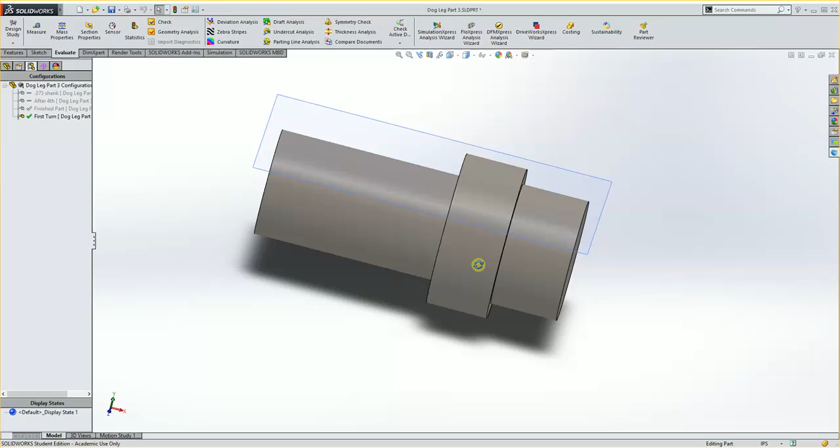So in order to do that, we're going to kind of get this reoriented to what we want. And we're going to change this to the after 4th configuration under the configuration tree, because this is what we're actually going to be programming here.

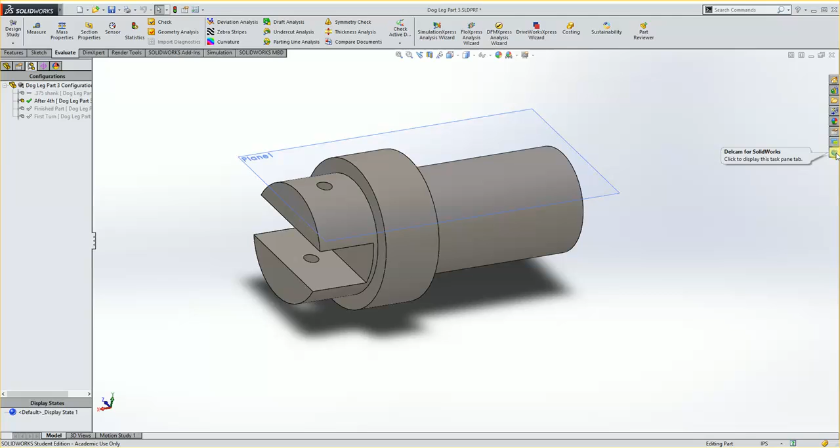Now, at this point, we're ready to kind of go into the DFS portion. So I'm going to go over here to Delcam for SolidWorks, machine a part, current part, yes, MC inch mill, because now we're going to the mill, open, and it will pull this in.

Now you'll see the Z is oriented right, and it doesn't matter how this looks here because it'll just rotate for us to get what we need. If we wanted the Z to point this way, we could, but we don't need to.

Right here, it's important though to change this from 3-axis milling to 4-axis milling. If we don't do that, it will try to make new setups on the side and think you're actually rotating the part in the vise and restarting.

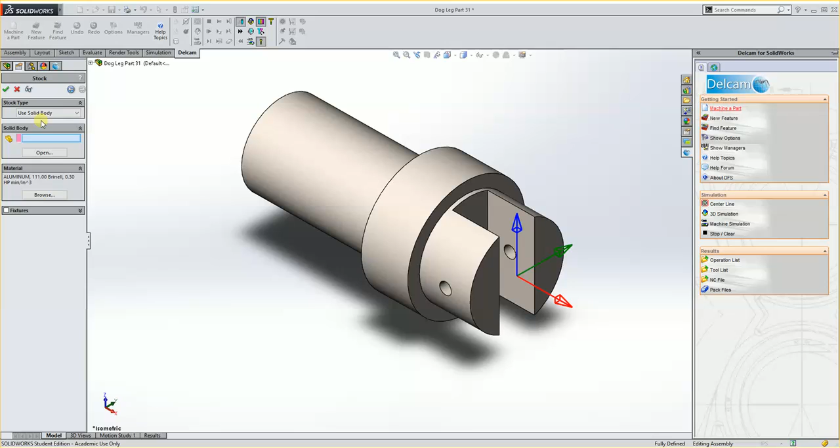I'm going to hit the next button, and here I want to change this from bounding box to use solid body. And my solid body, I'm going to say open, and we're going to find the actual part that we're using. In my case, it's on my desktop, under dogleg part 3.

When it asks us for the configuration here, I'm going to tell it first turn. So when you look here, you have your different configurations you made. I'm going to go with first turn and hit open.

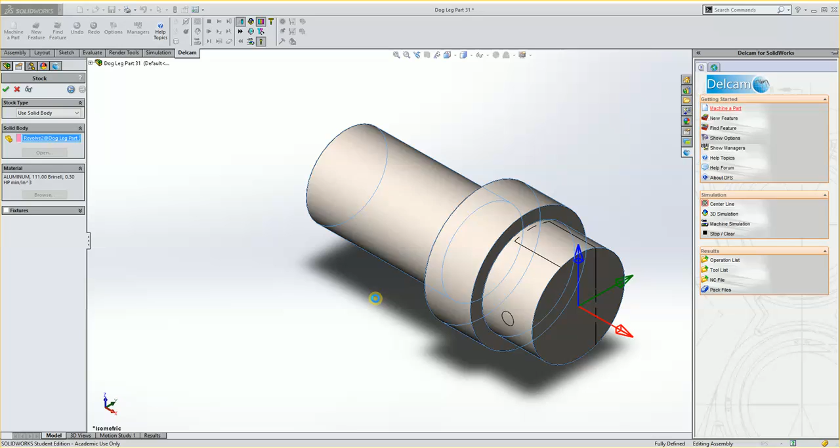And what that does is it pulls in the part that we had just basically turned on the lathe, and we'll use that as stock. Our material here will be changed now to stainless, and I'll say OK.

And I'll accept this. Now it asks us for our setup, and I can just go with what we have here. So I'm just going to say OK. Alright, so the setup is ready on this.

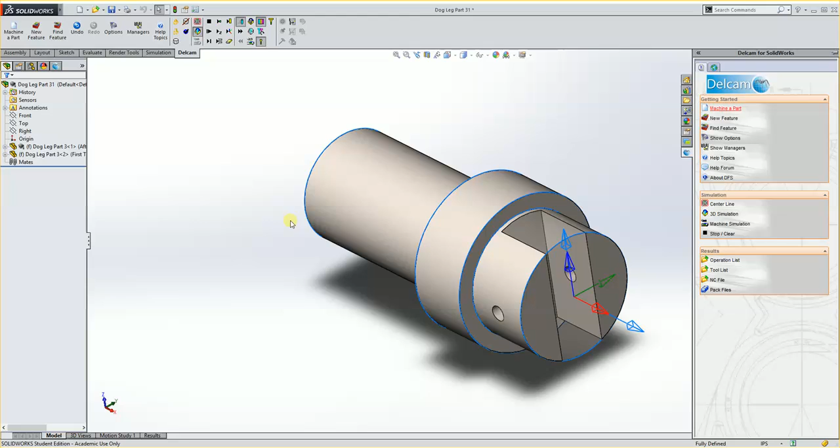Now, a couple things that we're going to need here. We're going to need to—well, there's only one thing. We're going to need to make a sketch that's out on this face that's in the center of this. So to do that, I'm going to pick this face right here, and I'm going to tell it that I want to sketch a line.

And I'm going to make the line from here, just kind of out a little ways to here. I'm not too worried about where it's at exactly yet. I just wanted to get it initially aligned to this origin here.

But I'm going to get rid of that relationship here because I want it to extend further this way. So I'm going to click on this relationship and hit delete. And then I can grab this endpoint and I can move it. I do want to try to keep it snapped. See how it snaps to the center there?

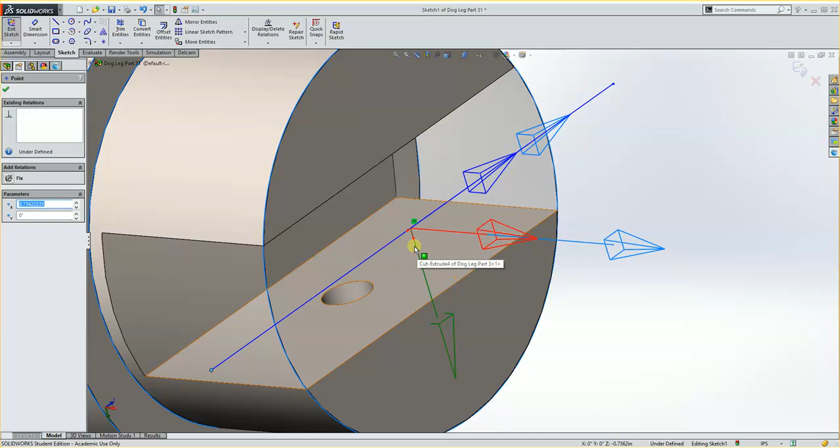And I want to then do some smart dimensioning on here. I'm going to smart dimension from the origin to the endpoint here. And I want this distance to be... Actually, now that I'm looking at this, I think this might not work right. I do want the distance to be something like 1.25. But the problem is that it's dimensioning it from the front.

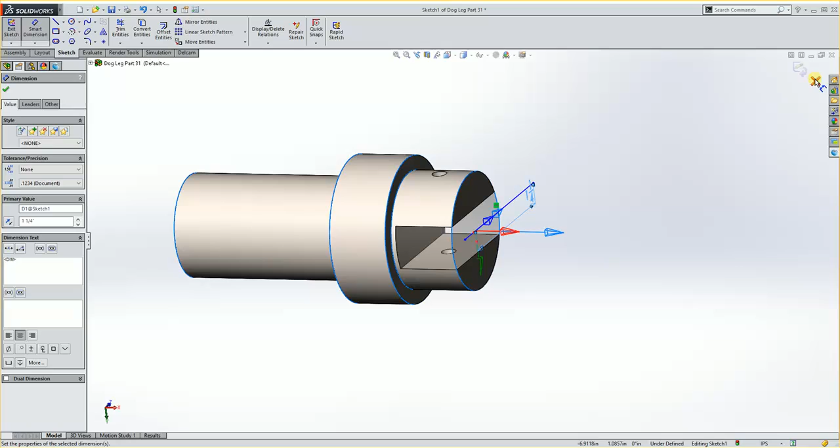And I want to do a side groove, so I need this sketch to really be on this plane here. So I'm going to go ahead and discard this, and discard my changes. And I'm going to make basically my sketch on the center axis here.

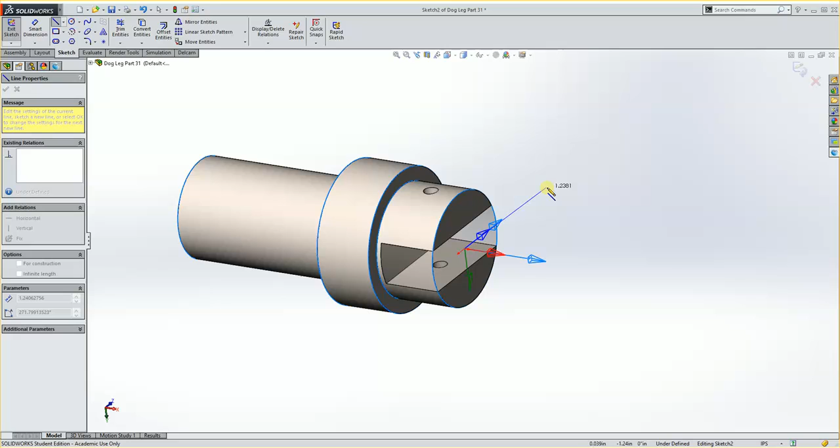So I need to look at this. Looks like my top plane is where I want to draw it. So I want to draw on my top plane. And I want then to make a line that goes from my origin out like so. And I'm going to hit escape.

Then I'm going to delete this relationship and do the same thing I was doing. I'm going to drag this out.

Alright, so now that line, when I smart dimension it from the origin to here, you'll see that my smart dimension is coming in from my top plane. And I'm going to make this 1.25 to start with. And that'll give me the distance out there.

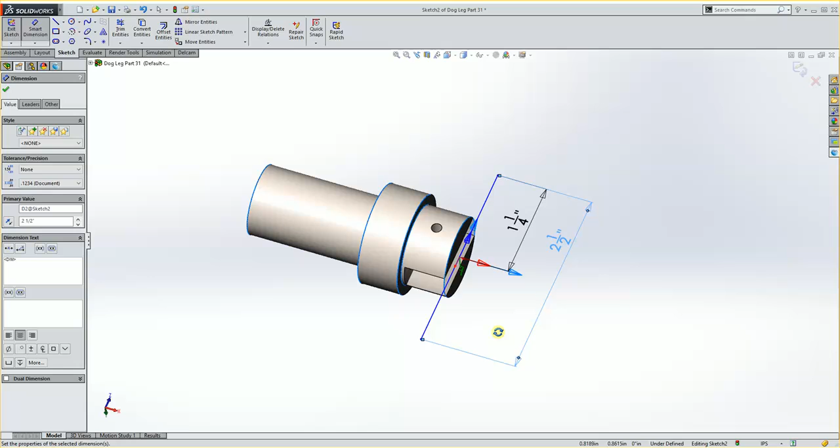And then I want to make this number of the entire line twice that amount, so it would be 1.25 times 2. That makes it so that it's going halfway up, halfway down, exactly in the center. And I'm going to accept that.

Now what the sketch is going to do is it's going to allow me to do the slit through here. And I need this line to be—it may need to get bigger so that the slitting tool doesn't come down and smack into these corners.

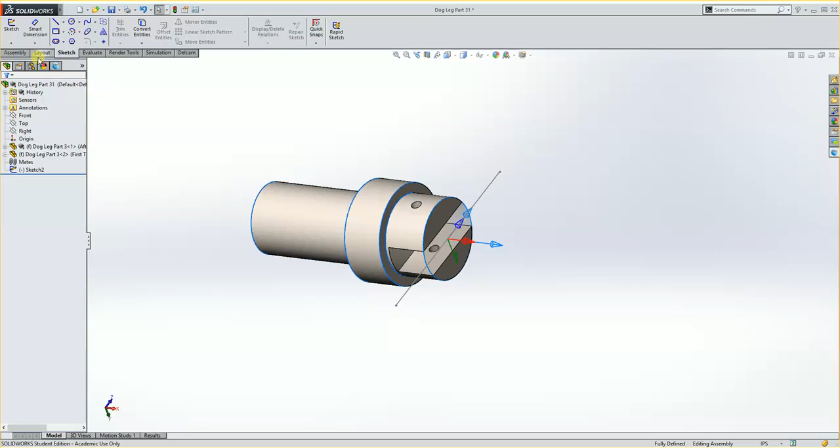Alright, so I'm going to now go in here and start getting this hole drilled through. I'm going to go to Delcam and do a new feature. What I'm going to do is spot drill and drill halfway through, rotate it around, spot drill and drill the other halfway through, and then ream from one side all the way through. But I'm going to set them up as both doing reams, and then just uncheck the ream portion of the first one. That way it'll pick a smaller drill for the first hole. So I'm going to go to hole and hit OK.

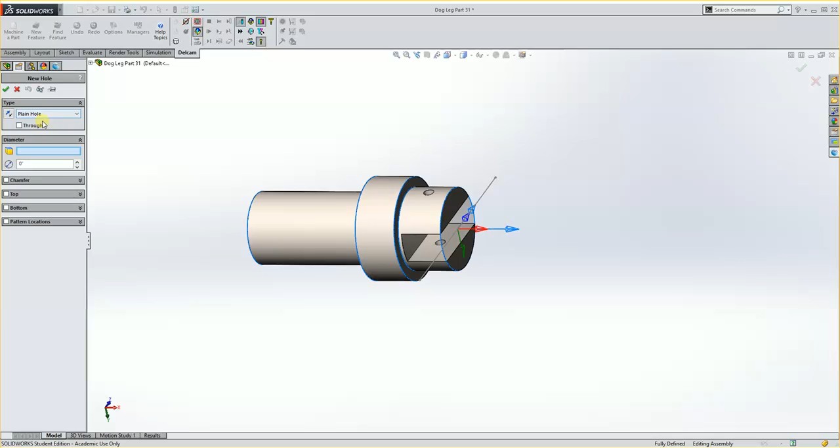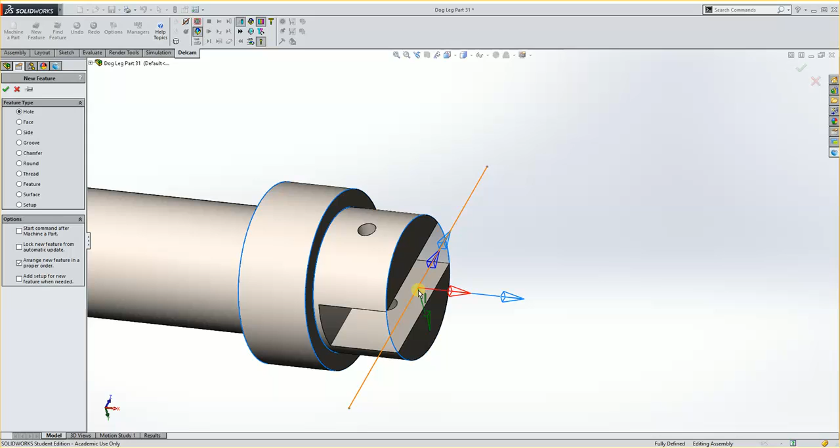Plain hole, and then my diameter, if I zoom in here, is going to be right here. Now one thing I want to do before this is make sure that a certain checkbox isn't on. I'm going to close this out and go over to DFS features. When I go to new feature, I just want to make sure down here there's not a checkbox in this 'add setup for new features when needed.' If that's checked, it'll try to make new G54, G55, G56s, and I want it to keep just the same one and then rotate the A axis.

Alright, so I have hole, I hit OK. Diameter, I'm going to pick this diameter here. And it's really important when you're doing fourth axis to look at how this yellow arrow is pointing. Notice how the yellow arrow is pointing up. In this case, it would try to take a drill and come up through that hole. Well, we want it to go down through that hole. So I need to click on this button right here that says flip. Now you'll see it's trying to drill down into it. So that works out okay.

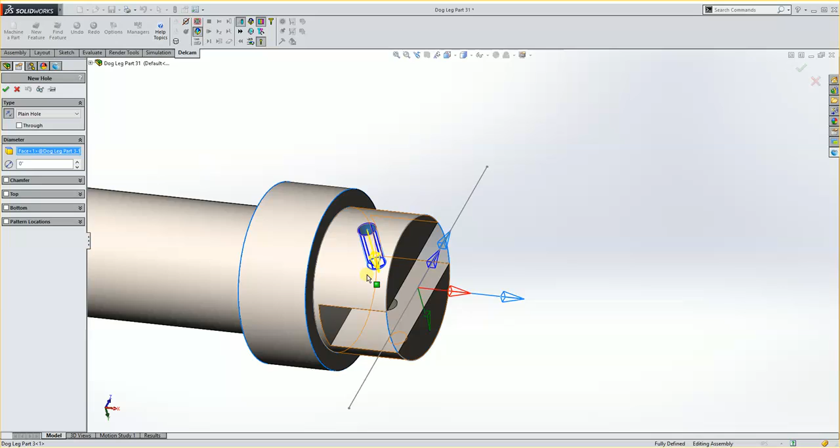Basically, the next thing I want to do is have this go a little deeper. So my bottom, if I look right here, I'll click bottom and pick this face here. It's going to go to that face, but I want it to go an additional 0.2, so that'll get it to go a little bit more than halfway. This is 3/8 wide, so that would be 0.1875. I could even go maybe a little more, maybe 0.250, just to get it to go enough. And then I'm going to hit OK.

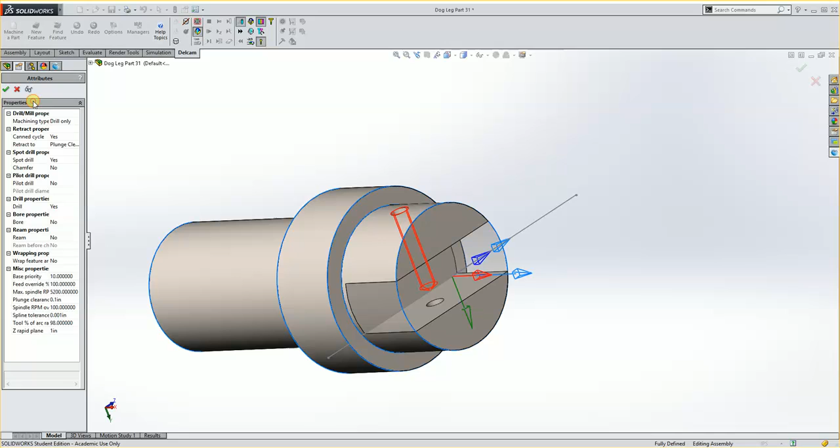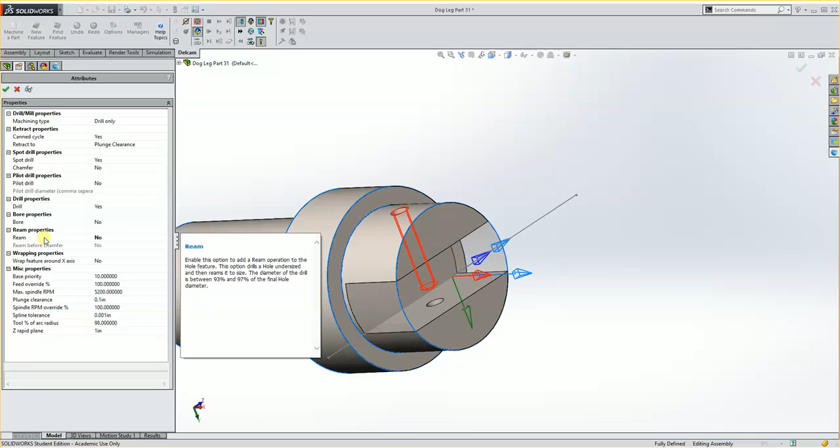Now it spot drills and drills it, which is a good start. I want to go into my hole and double click it, and I want it to say that I want to ream it. So here it says ream: no. I'm going to double click that to say yes, and hit OK. Now it says spot drill, drill, and ream. I don't really want it to ream that, I want to uncheck the ream. But the point is to tell it to ream it so that the drill size brings in the 120 drill, or the number 31. If I don't do that, for instance, if I go back in and tell it ream: no, and hit OK, you'll see that my drill size is trying to be the 125. So I'm going to go back in again and double click ream to yes, and that way it'll update the drill to the smaller size.

Alright, now I need to do another new feature, hole, and this time I'm using this hole. You'll see the arrow's the wrong way again, so I flip it. And I tell it bottom of here with an additional, again, 0.2, so that it goes through. And you'll see that they're hitting each other. I'll hit OK. This one spot drills and drills, and now I want this one to ream. So I double click here and say ream to yes, and hit OK.

And then I'm going to tell it in my ream, when I double click the ream, that I want it to go a certain depth. My drill depth for the ream, I want it to go all the way through. So since we know this is a 1-inch diameter here, I'm going to tell it that I want to go 1.1, something to go a little bit through it. Then hit OK.

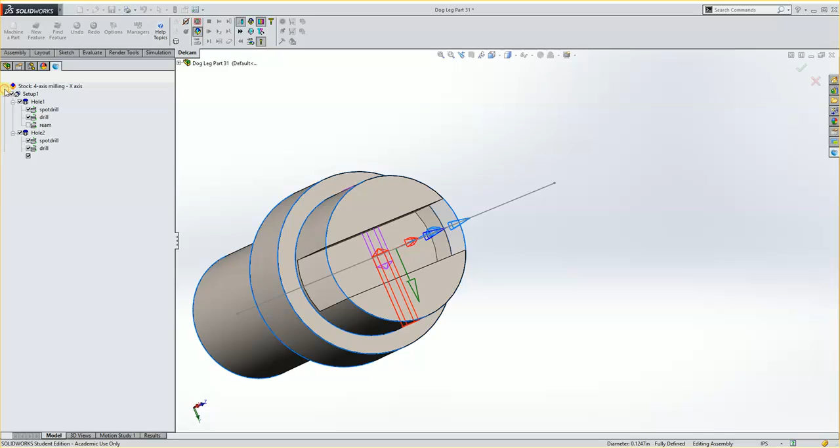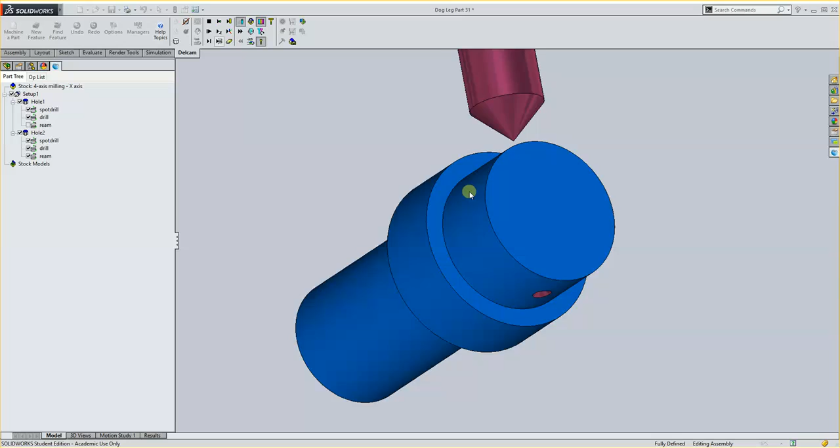Alright, so let's look at a simulation here. If I single step this, you'll see it comes in with my spot drill, rotates that back a little bit, spots it, and it's going to rotate my part around. Now if I look down here, you'll see that it's rotated, and I'll do this side, so it does both hole spotting. Then it comes in, grabs a drill, drills this side. Notice how it's pecking.

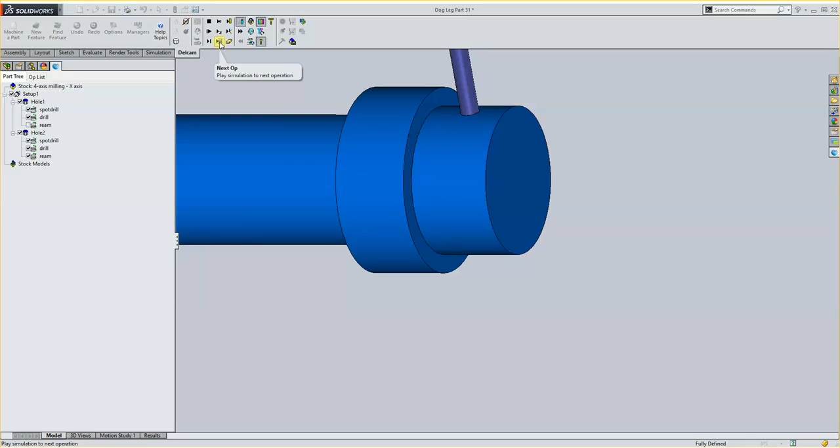And I can tell it to go to the next operation. I'll single step it. Now it's going to drill the other side, next operation. And then I'll single step and you'll see the reamer goes all the way through. And I will stop it.

So you'll see I have my hole all the way through there. Alright, so that was the easy part. The harder part is getting this slitting saw to come through here.

Now with this here, I'm going to do a new feature. And this is going to be a groove. And I'm going to hit OK. The type of groove we're going to do here is a side groove.

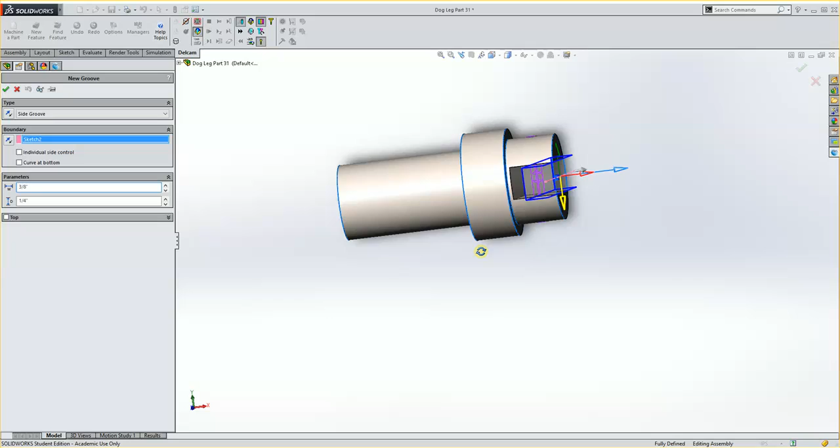My boundary will be this one here. And you'll notice how, because I put the line where it's supposed to, it is centering it and everything. That's good. The width of my groove is going to be 0.375. And the depth of my groove is going to be 0.25.

I'll zoom in here a little bit. You'll see that goes right to the bottom of that there. So everything looks pretty good here. So I'm going to hit OK. Now I get my groove there.

I'm going to uncheck the groove so that I can actually just play a simulation here of the whole thing, hole-wise, and save this as a starting point, so I don't have to re-simulate that each time. And I'll stop. I'm going to uncheck hole 1 and hole 2 and check groove 1.

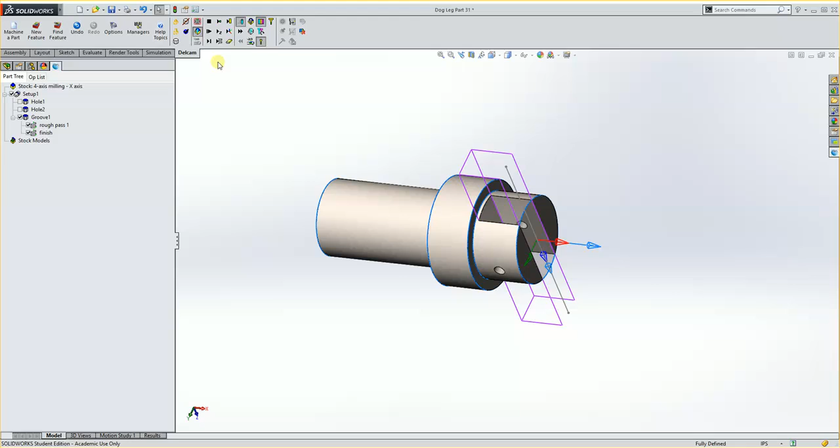And now this way I can do a simulation stepping it and single step. And I can see my tool here. I'm going to look at this in more of a top view.

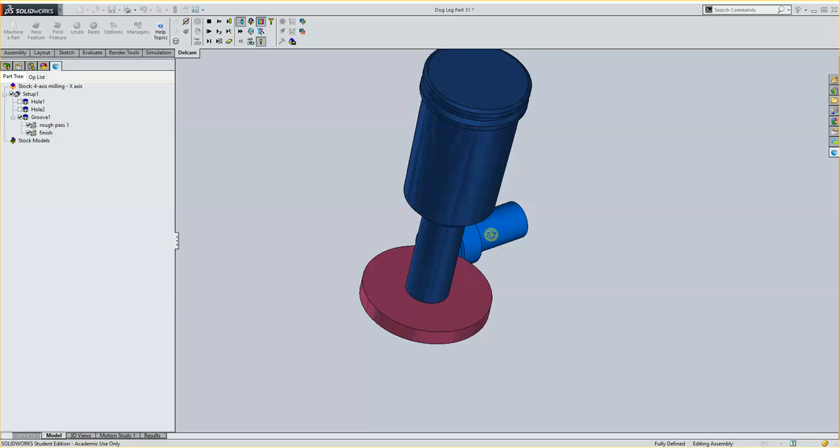And there's going to be some stuff I'm going to need to change about this. There we go. So if I step this, you'll see it comes in, but it's taking one hefty cut and going across, coming out, and then it does the finish pass. That's all fine and dandy if you had some miracle cutter, but that's not going to work on what we have. We need to step that in 3 times.

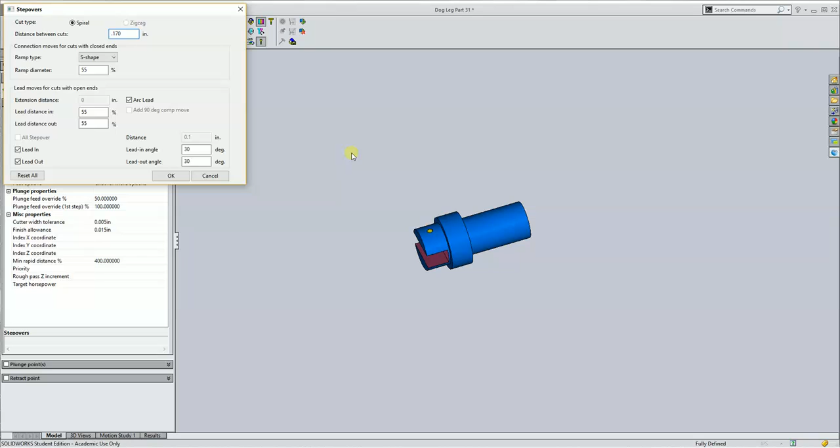Now when we step that in, we'll run into problems where for some reason the lead in, lead out doesn't work properly when we have extra rough cuts. So if I go in here to rough passes and I go to step overs, if I change this number up here to 0.170, which is a number that we've come up with in the past that works, and I hit OK, and then I try simulating it, what it will do is basically crash into my part.

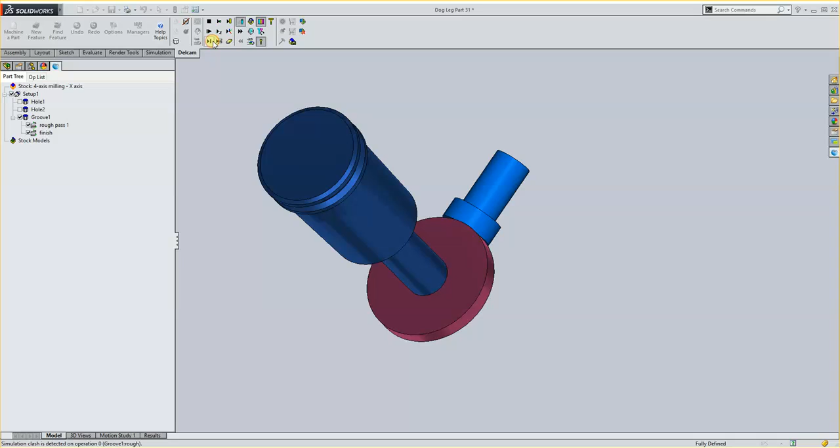Of course, it's not looking like it is here. Let's see. And it's actually coming back and then crashing. And see how it's crashing into the part.

So it's doing a couple things I don't like. I don't like the bidirectional cutting. And I need to extend my line because it's crashing in because the lead in, lead out isn't working properly.

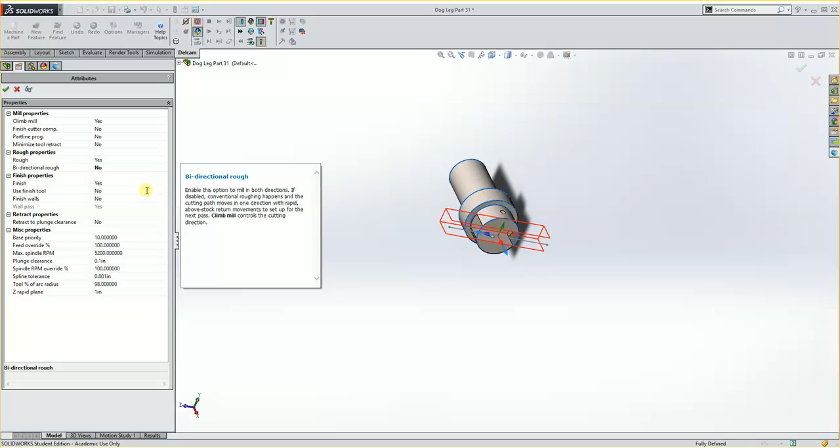So to do this under my groove 1, I'm going to double click it, and I'm going to see a spot in here which says bidirectional rough. I want to turn that to no. It's the only thing I need to change in there.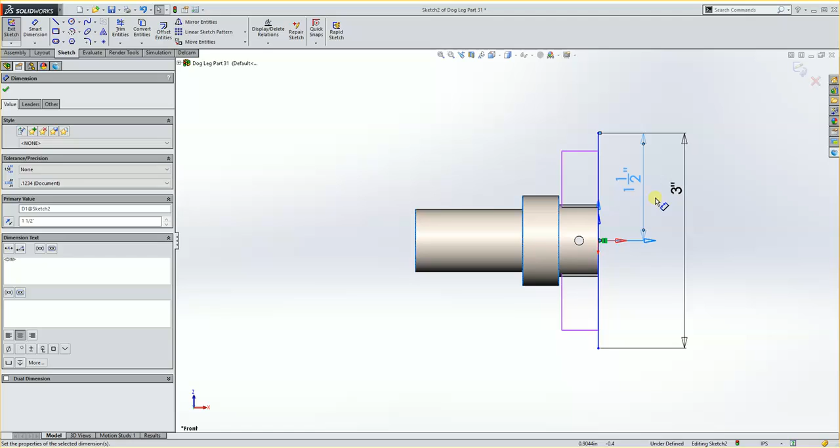And then I'm going to look at this from a top view, and I'm going to edit this curve. I want this to go a little longer. So I'm going to go edit sketch, and I want this to maybe be, oh, let's say 3 inches long. And then this would have to be 1.5 to get it centered. And I'll hit OK. Now if I simulate this tool,

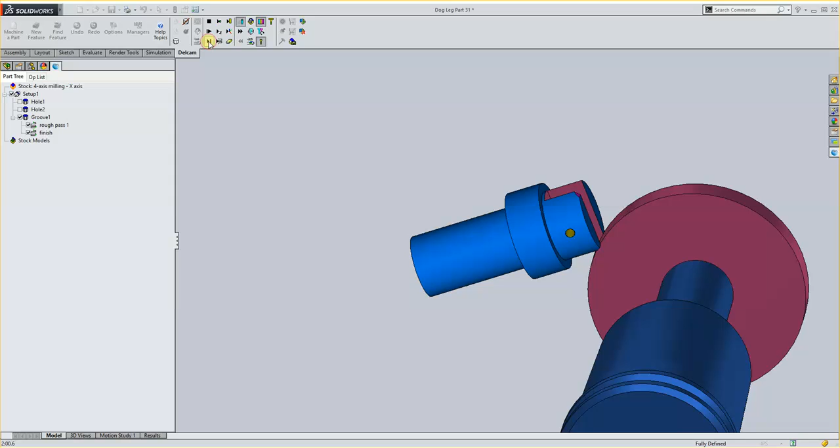It'll come through. So see how it's climb cutting each time. And it's still hitting a little bit there. But it's pretty good. We could just extend that a little bit more and it would get rid of this little clip.

But you'll see it going way in and out here on the finish pass. So on the finish pass, we're going to turn off the lead in, lead out. We'll just do it on both because it's really not working for us.

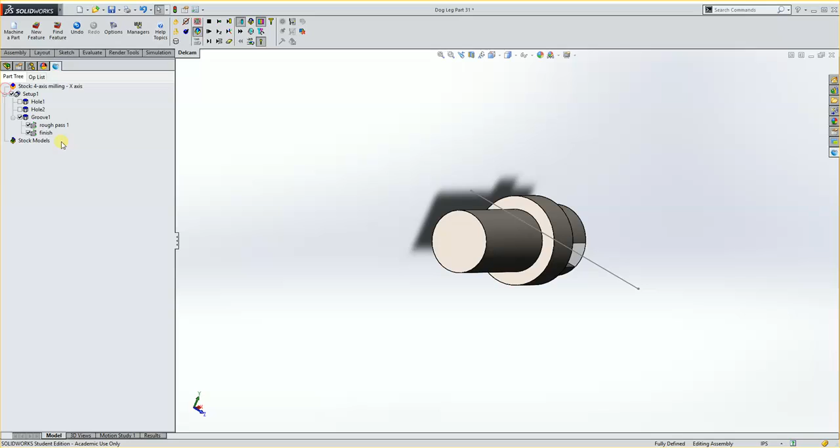So I'm going to go to rough pass 1, double click, step overs, double click, and I'm just going to turn the lead in and lead out off and hit OK. Then I'm going to go into the finish and do the same thing. Step overs, turn the lead in, lead out, off, and OK.

And again, I wanted to make this sketch a little longer, so I click it, edit, make it 3.25, and make my other half 3.25 divided by 2 to get it centered.

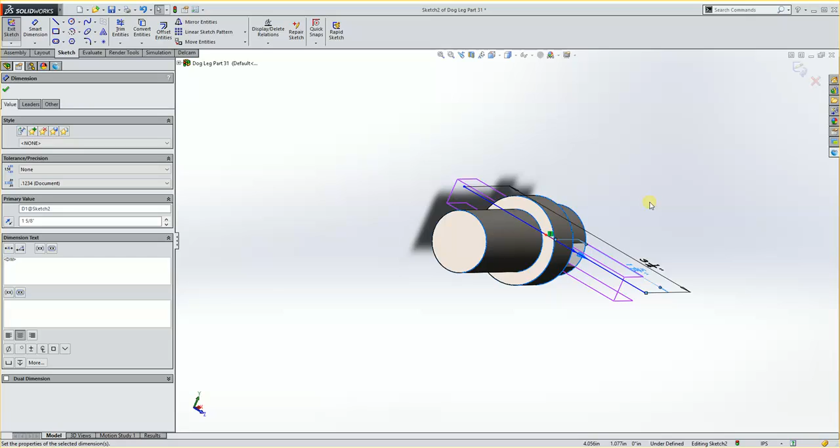Alright, we'll play it one more time. You'll see it cuts and there aren't any crashes into it.

I want to do the slit after I drill the hole so that it deburrs it. If I slit it and then I drill it through, I'm worried that I'm going to get burrs in here and then I'm not going to get this piece in here.

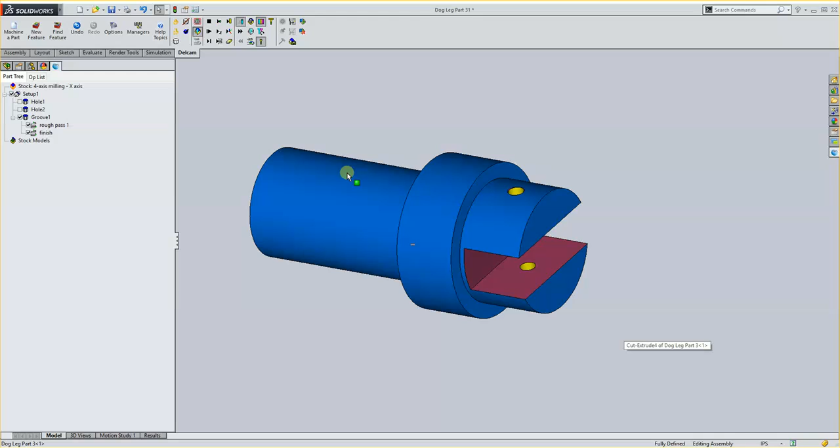Alright, so this part is looking good. It's actually done. So at this point you would post out your code and you'd be good to go. I'm going to stop it here and you'll go on to the next video.